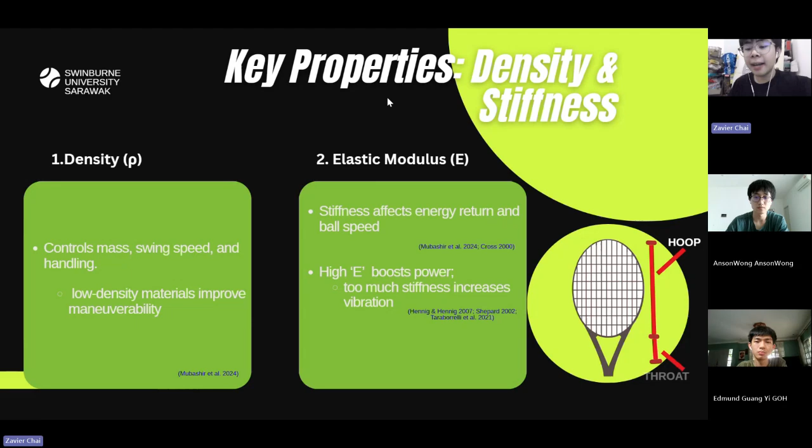Moving on to strength. The material needs high yield and tensile strength so that it doesn't deform or crack under repeated impacts. Every ball strike puts the frame through tension, compression, and bending. If the strength is too low, the frame slowly warps or fails, which ruins performance.

Structural design also plays a huge role. Beam thickness and the geometry of the frame directly influence stiffness, the optimal hitting spot size, and the overall stability of the frame and racket. Wider beams at the throat increase stiffness and therefore power, while thinner beams improve the feel but reduce the stability of the racket itself.

Mass distribution also shapes the racket's swing weight. A heavy racket would give more power and plowing power through the ball, while a headlight racket offers better maneuverability and control. This mix is where composites make it easy to fine-tune mass placement, for example.

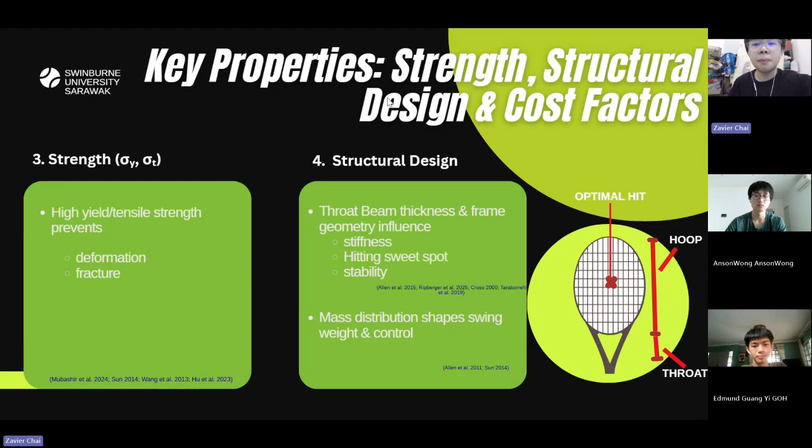Finally, cost. Material cost needs to balance stiffness, strength, weight, and manufacturability. It's a multi-criteria engineering decision and not just a price tag. High modulus carbon fiber, for example, gives good performance, but is extremely expensive because of labor-intensive layups and precision curing cycles.

But cheaper materials like aluminium and low-grade graphite reduce costs, but they're heavier and have worse vibration dampening. They're fine for beginners, but the trade-off is that it's not ideal for larger competitive play. And those are the key material factors that determine how a tennis racket frame performs.

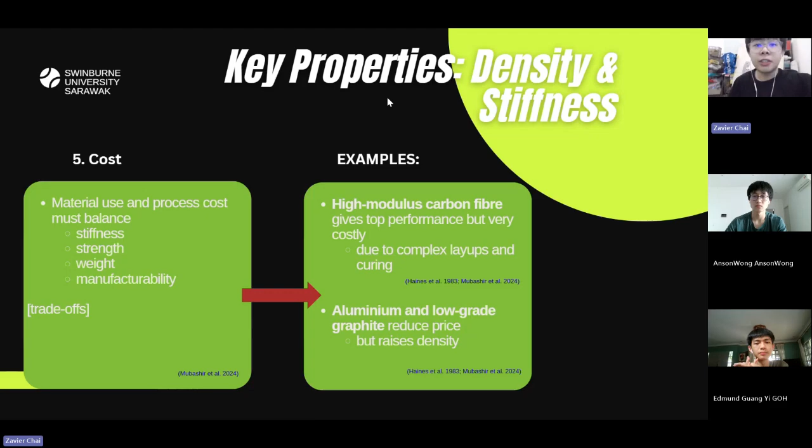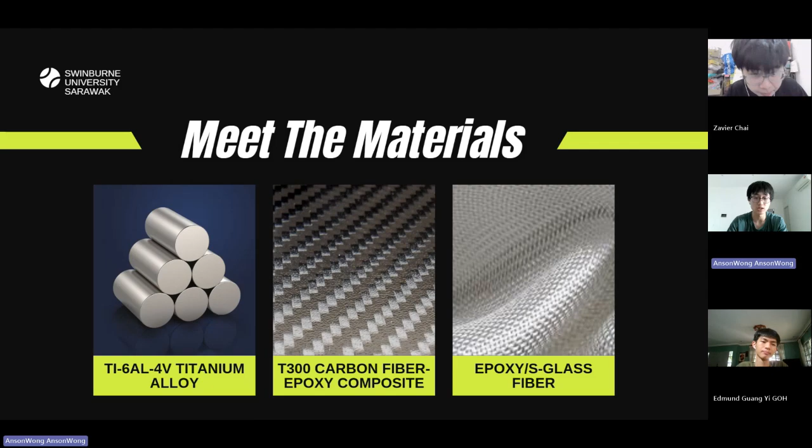Thank you, Zavier. Now I will continue with the material explanation and justification. Three materials are selected and compared, which are Ti6Al4V titanium alloy, T300 carbon fiber epoxy composite, and epoxy S-glass fiber.

Ti6Al4V titanium alloy, also known as grade 5 titanium, derives its name from the proportional composition of its constituent metals, with approximately 90% titanium, 6% aluminum, and 4% vanadium. The alloy offers a density of 4.43 grams per cm cubed, a tensile strength of 1,170 megapascal, a yield strength of 1,100 megapascal, and a stiffness of 114 gigapascal.

As players, we are more focused on the yield strength, as we don't want the frame to undergo permanent distortion or bending. The alloy is more suitable for a diamond-shaped racket, which prioritizes power over control by concentrating its weight in the upper parts. The average cost of the alloy is around $70 per kg.

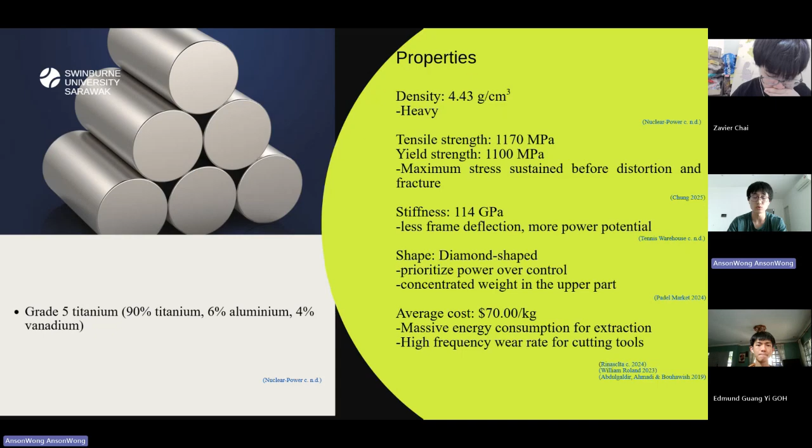It's because of the complex extraction process of titanium ore, which requires high energy consumption. Besides, the high hardness and tensile strength make the CNC process difficult, as the cutting tool will wear faster and require frequent replacement, which is costly.

T300 carbon fiber epoxy composite is classified under the carbon fiber reinforced plastic category. A composite consists of two phases, which are the matrix phase and the dispersed phase. The matrix phase protects the underlying brittle carbon fiber, while the dispersed phase enhances matrix properties, resulting in a composite that combines the strength of both materials and inherits their average mechanical properties.

The composite offers a density of 1.55 grams per cm cubed, an ultimate tensile strength of 1,800 megapascal, and a stiffness of 115 gigapascal.

Ultimate tensile strength is typically used for composites because failure begins when the fracture starts. The composite is more suitable for a round-shaped racket, which prioritizes control over power by distributing its weight in all parts. The average cost of the composite is approximately $35 per kg.

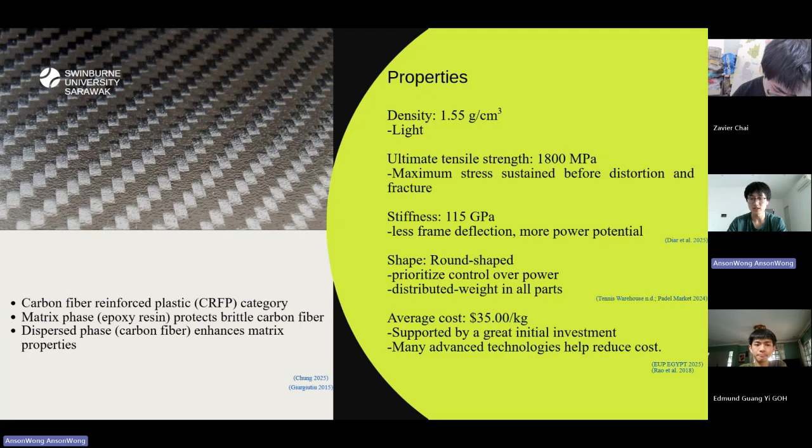This is because its huge market potential attracts worldwide investment to develop advanced technology that helps reduce costs substantially. Next, epoxy S-glass fiber is also a composite, generally composed of epoxy resin as the matrix phase and S-glass fiber as the dispersed phase. The S represents the high silica content.

The composite offers a density of 2 grams per cm cubed, an ultimate tensile strength of 1,700 megapascals, and a stiffness of 50 gigapascals. Due to its medium weight, the composite is preferably formed into a teardrop shape, which gives balance between control and power. Its average cost is approximately $25.3 per kg.

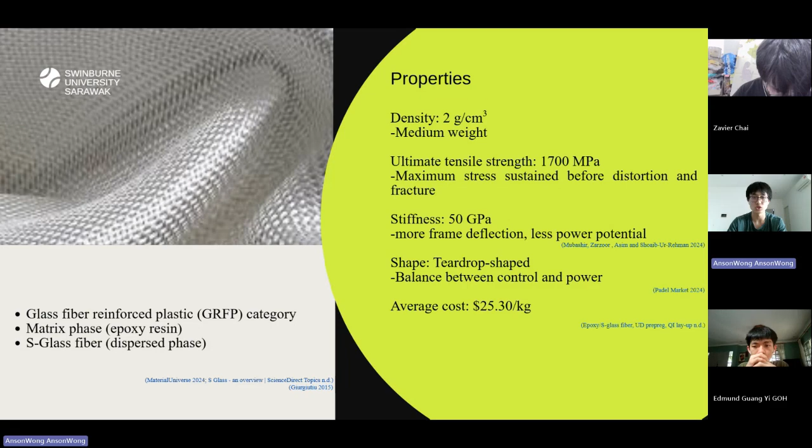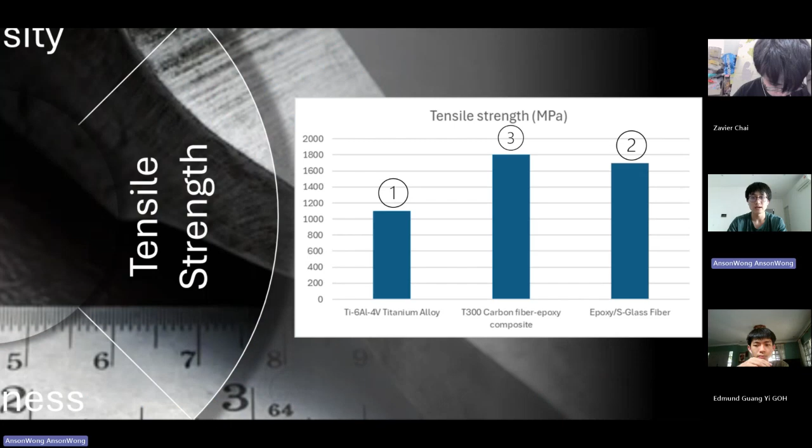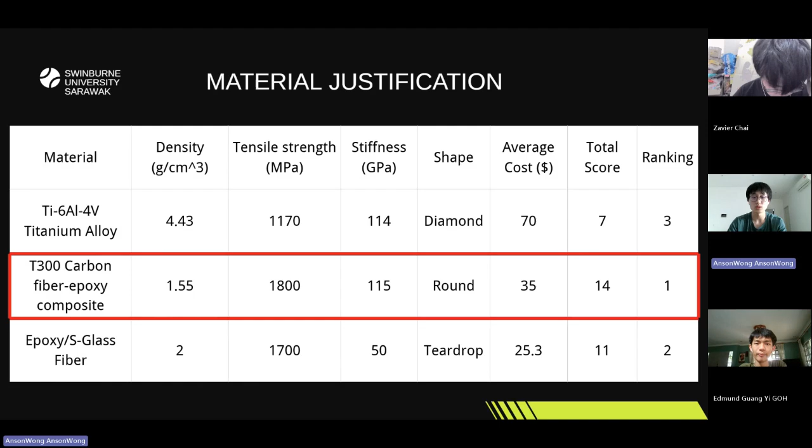For the frame geometry, each material is assigned the most suitable shape to maximize its performance, and therefore all are given 3 marks. After calculating the total score, T300 carbon fiber epoxy ranks first and is the most suitable material for a tennis frame. Now I'll pass time to Edmund.

Thank you, Anson. Although the T300 carbon fiber epoxy composite is the optimal choice for tennis racket frames based on its key properties, it is important to view how sustainable it is. Therefore, let's explore the sustainability of CFRPs, which are carbon fiber reinforced plastics.

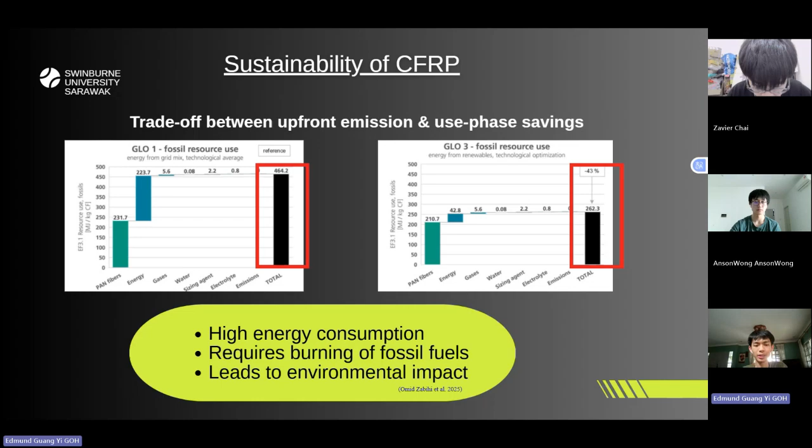The first sustainability benefit is that CFRP has a trade-off between its upfront emissions and potential use phase savings. Based on the two diagrams, virgin carbon fiber production requires a high energy intensity of 262.3 to 464.2 megajoules per kg. This high energy consumption plays a major role in environmental impact, as some of the raw materials needed to produce that energy may emit greenhouse gases.

This includes the burning of fossil fuels that produce carbon dioxide. However, remember how CFRPs are low in density? That means it is a lightweight material. This causes the fuel consumption of vehicles such as cars and planes with parts made from CFRPs to be much lower, compensating for the environmental burden caused by its energy consumption and making it more environmentally favorable.

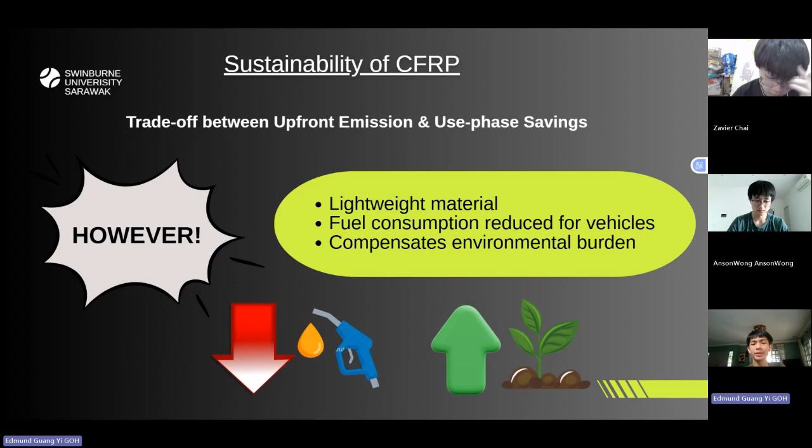The next sustainability benefit is that CFRP waste can be recycled or repurposed. For example, CFRP scraps can be used in cement matrix composites such as concrete. This naturally improves the mechanical properties of cement mortar, including flexural strength and ductility, helping reduce the use of virgin materials such as sand and cement in the concrete mix.

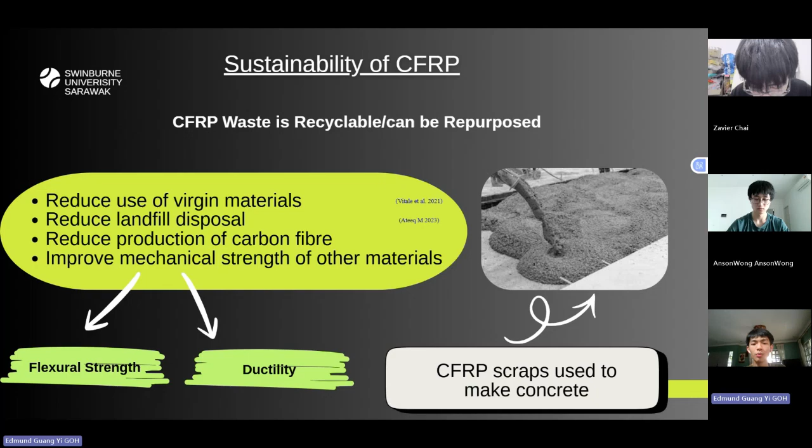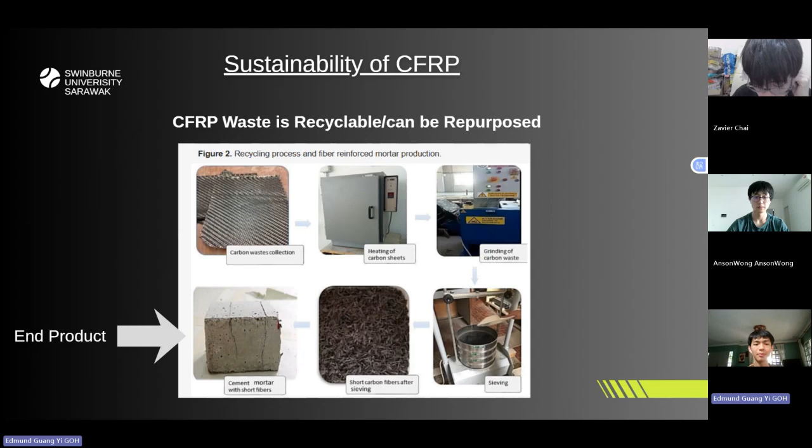Additionally, it also reduces landfill disposal and decreases the need for producing carbon fiber, which requires a lot of energy as mentioned before. Here is the example process of how CFRP waste can be repurposed. Carbon waste is collected and heated at high temperatures. Subsequently, the carbon waste is ground and undergoes sieving to separate unwanted particles. Finally, the carbon fibers become small and are ready to use as the fiber phase for cement mortars.

The final sustainability benefit is that CFRPs can be repaired, bringing economic and environmental benefits. According to a life cycle costing test report, CFRP is economically sustainable for manufacturers. The diagrams with S1, S2, and S3 refer to three different costs of producing CFRP material. The two tables include costs for CFRP materials whether the matrix phase is made from fossil fuels or bio-based chemicals. The NPV, or net present value, of all scenarios for both tables is positive, meaning repairing CFRPs is economically beneficial.

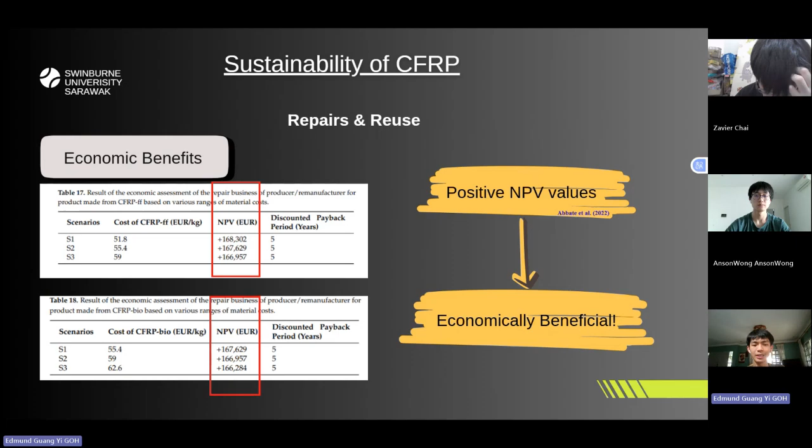As for the perspective of environmental benefits, it's shown in this graph. Dark blue and gray bars represent substituting the CFRP materials entirely, whereas dark pink and light pink bars represent repairing them. The percentages show the level of impact of these methods on the environment, such as climate change and human toxicity. It's noticeable that the dark pink and light pink bars are shorter than the dark blue and gray bars for most areas of impact, indicating CFRP repair imposes less environmental impact than substituting. The environmental impact is reduced by up to 50% when repairing CFRP parts rather than producing new ones.

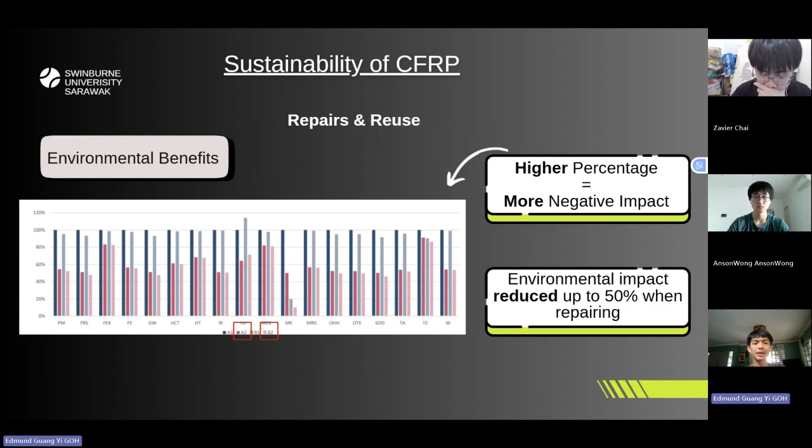To sum up our findings, the T300 carbon fiber epoxy composite is the best material for tennis racket frames based on its properties of high stiffness and tensile strength, round shape for control, low density for lightness, and relatively low cost. It also shows strong sustainability benefits, such as low fuel consumption, recyclability, and repair benefits.